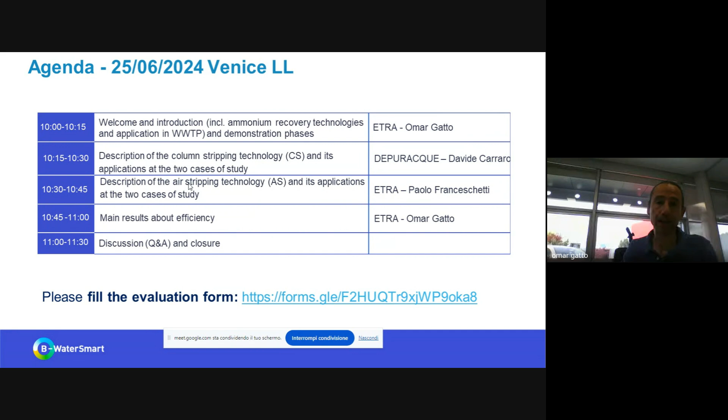The Venice case is a part of the B-WaterSmart project, and there are 6 members: 2 are multi-utility companies, Veritas and ETRA; 2 are private companies in the sector of recovery of water and wastewater treatment plants, that are Hydrotech and Depuracque; then there is Sintef, that is our mentor, and Engineering, that is an IT company.

Our living lab focuses mainly on water recovery, management of sludge, and nitrogen recovery from the streams that are managed inside the wastewater treatment plants, and its recovery as fertilizer.

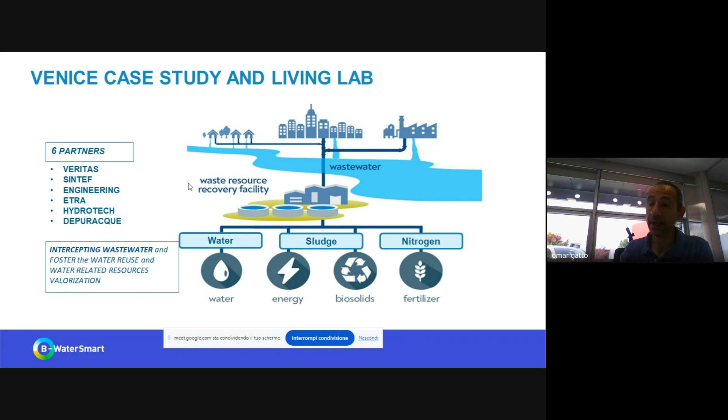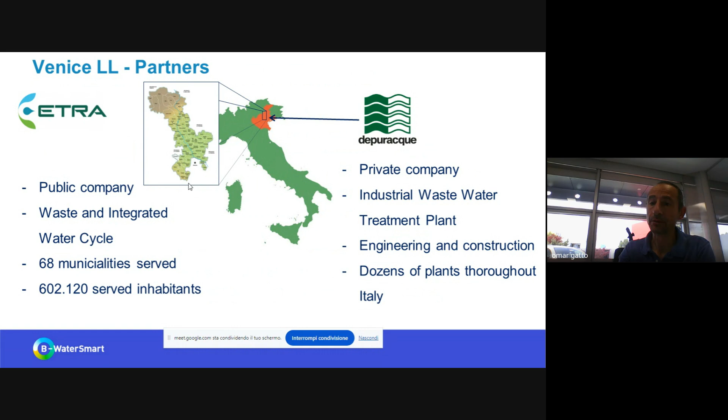The 2 main partners in the pilot tests of the technologies to recover the nitrogen are ETRA and Depuracque. Our focus is on the recovery as fertilizer.

Usually, in ordinary processes in wastewater treatment plants, we manage 3 fertilizing elements: phosphorus, that is segregated inside the biomass of the sludge; carbon, that is decomposed to CO2 and released in the atmosphere, and mainly it is part of the biomass of the sludge, 35% on dry matter, more or less.

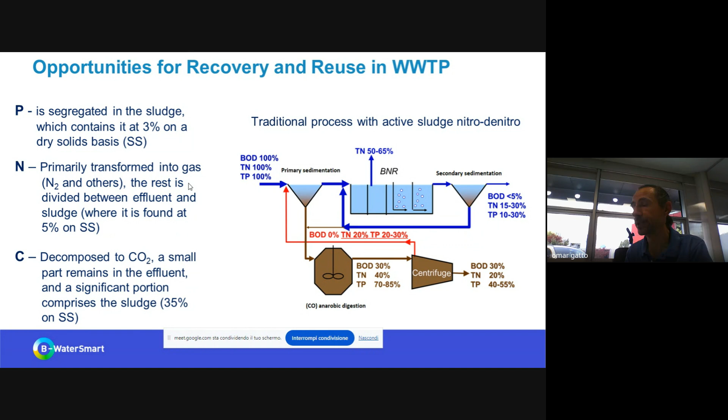And the last one is nitrogen, our element of study, that is mainly transformed into molecular nitrogen, and in this form, passes to the atmosphere, and a little part, some milligrams per liter, exits the plant with the effluent, and more or less 5% of the sludge is composed of nitrogen that forms part of the biomass.

Which are the numbers? What are the numbers we have to deal with talking about nitrogen as recovered fertilizer?

These numbers are an estimation for our entire region, Veneto. As you can see, about 5,000 tons per year of nitrogen remains inside the effluent, and could be recovered with irrigation. Another 2,000 tons per year are inside the sludge that are suitable for agricultural reuse, and they are almost entirely recovered.

And there is another smaller part, 600 tons per year, that could derive from centrates. Centrate is the liquid fraction of the dewatering of the digestate, deriving from the anaerobic digestion of sludge.

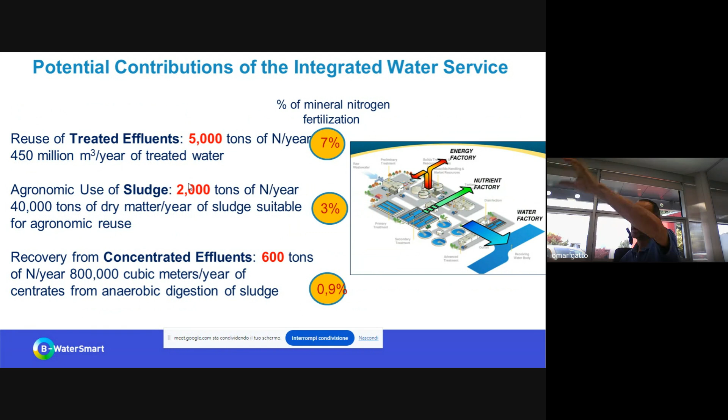On the right side, you can see some percentages. These percentages are the percentage of the total mineral nitrogen fertilization of the region. And as you can see, each fraction of the total nitrogen that can be recovered is small, because nitrogen fertilization in Veneto is very diffused and very used, and approximately 70,000 tons per year of nitrogen is used as mineral fertilizer.

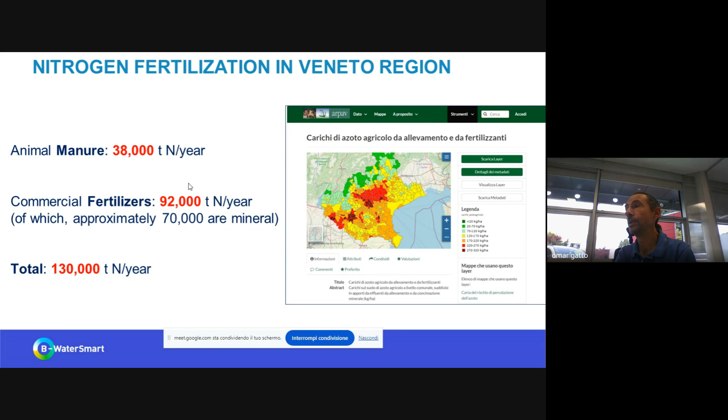But these are small numbers, what we can recover. But we think that it's worth understanding better the issue, because about nitrogen fertilization, we have some problems, because the EU totally depends on non-EU countries to have the fertilizer and the raw materials.

It means that we are hostage of the variation of prices that we saw, particularly during the pandemic and after the war, the Ukrainian war.

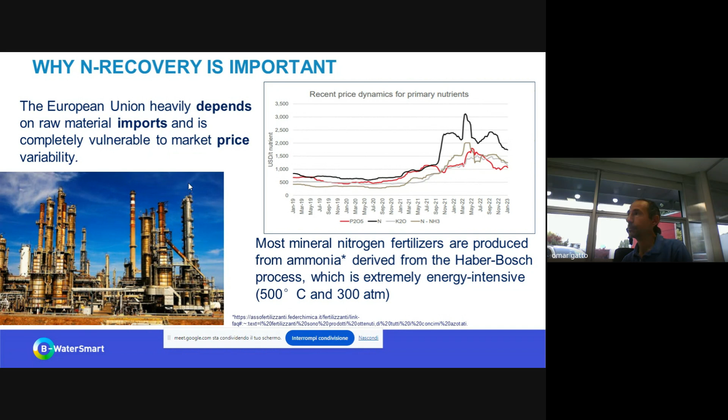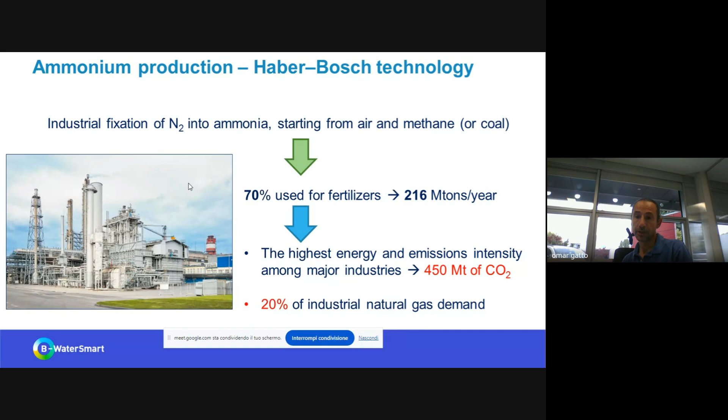And another problem is that mainly nitrogen fertilizer is produced by the Haber-Bosch process, that works at very high temperature and pressures, and it is the highest energy and emission intensity among major industries in the world. So the environmental impact is very high, especially in terms of GHG emissions.

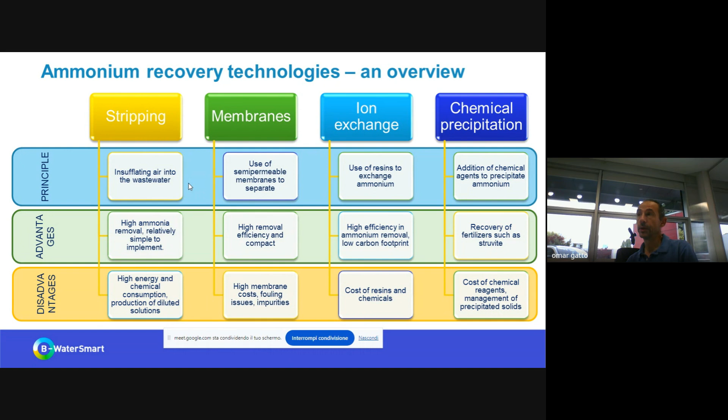Stripping is the last technology, and is the technology we have used in our test. The general principle of stripping is that inside wastewater, ammonia is present in two species: ammonium as salt and ion, and ammonia, a gas dissolved inside the water. If you let an airstream cross the wastewater, the gas ammonia follows the airstream, and this stream enriched in ammonia can be put in contact with an acid, for example sulfuric acid, to produce a solution of a salt, ammonium sulfate in this case.

And in this way, you can recover the ammonia present in the wastewater. The two main parameters that influence the yields of this process are pH and temperature, as you can see in this figure. The higher both pH and temperature are, the higher the yield.

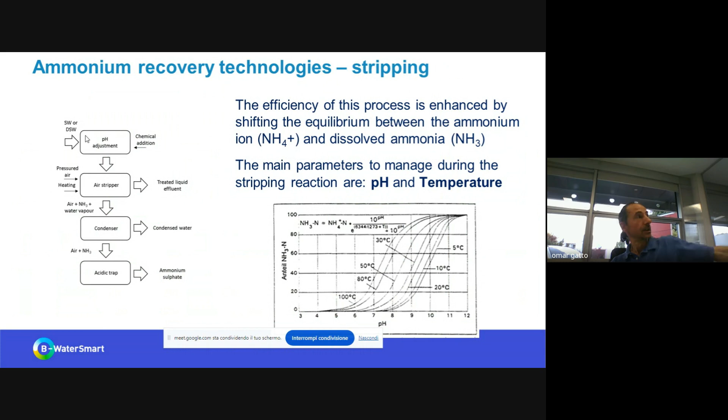Well, after this short introduction, I give the floor to Davide and Paolo, who will talk about the two technologies we used during the pilot test: column stripping and aeration stripping. I leave the chair to Davide, who will talk about column stripping.

Thank you very much, Omar. Hello, everyone. My name is Davide Carraro. I work with Depuracque Servizi, a utility in the Venice area. We engineer wastewater treatment plants, and today I'm going to show you the principle behind the column stripping technology.

Every ammonia-rich wastewater enters inside the first column, and through some nozzles it is sprayed downward, falling by gravity to reach the bottom of the column. Meanwhile, there is a countercurrent air flux in contact with the liquid phase, and by heating the stream to a high temperature and increasing the pH to basic values, we are able to increase the ammonia phase transfer from the liquid phase to the gaseous phase.

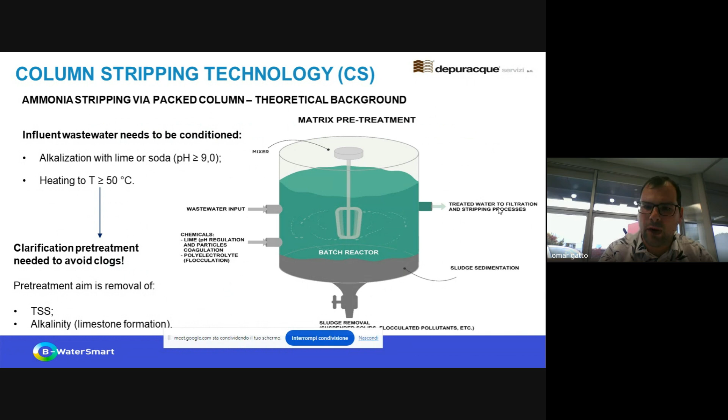Overall, in this slide I show how our stripping plant worked. As you can see from this image, from left to right, we have the wastewater hold-up tank, the flocculation-sedimentation reactor in which the alkalization pretreatment is performed, and then the wastewater reaches the two columns.

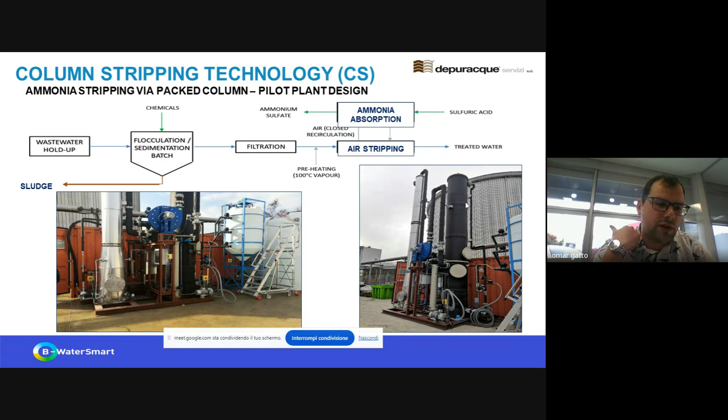Here on the left, you can see the first one, the stripping column, which is made up of stainless steel. And on the right, the absorption column, which is made of a plastic material, since it has to be in contact with the concentrated sulfuric acid.

In conclusion, our plant is able to allow a continuous flow process, and the pretreatment reactor is dimensioned with proper dimensions that guarantee continuous feeding to the column. Our system, compared with other technologies, is more compact and smaller in size, but above all, it can guarantee high quantitative ammonia removal efficiencies.

Since we are able to control either pH or temperature, our working conditions are very flexible, as we can modulate both working pH and temperature, as we'll see later in the results section. As I said before, the fact that we recirculate the gaseous stream allows us to avoid any atmospheric emissions.

However, there are also some disadvantages. I have to mention that our pretreatment generates sludge, which has to be properly disposed of or destroyed. We unfortunately have to precondition the wastewater input in order to remove both suspended solids and alkalinity. And in order for our conditions to be representative, we must run our experiments at a minimum flow rate, which ranges from 250 to 500 liters per hour.

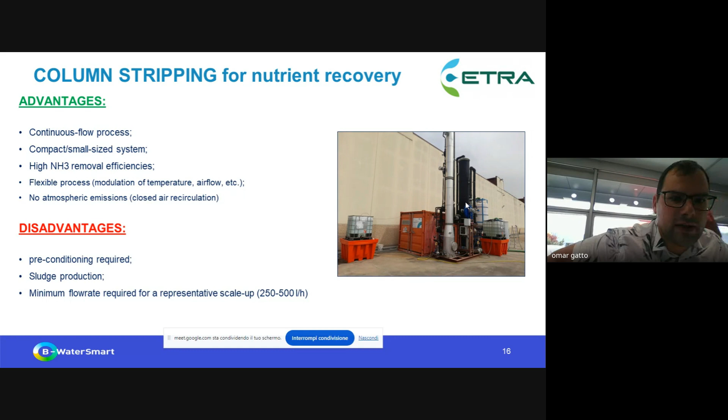ETRA has tested a different kind of technology called air stripping technology, based on the same principle as the technology presented before by my colleague, but there are some differences. First, I want to say that we were the testing partner of this technology, but it was provided by a local private company that built the project's testing pilot.

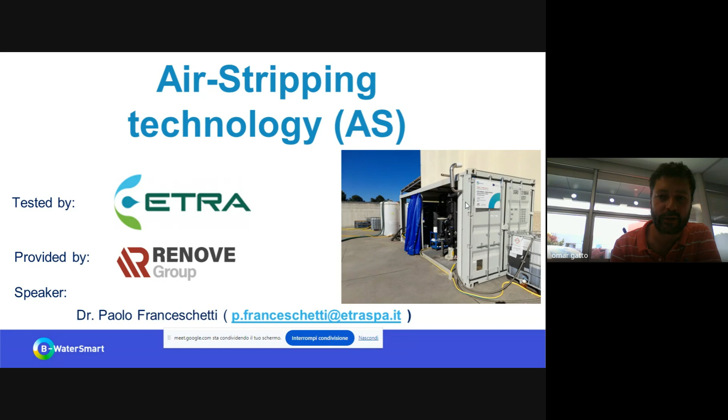The air stripping technology is based, as I said, on the same principle. So we have a stripper and an absorber part. But the main difference is that we feed the stripper directly with the solution that we are going to treat.

So in this case we don't have a pre-treatment, as I said before, but we move inside the stripper, which is a tank, where we are going to heat the solution thanks to waste heat or another source of heat, or in our case electricity, since we use a pilot scale plant. Inside the stripper we have air injection from the bottom with nozzles that create small bubbles.

These bubbles pass through the concentrate, or through the wastewater that we are going to treat. And thanks to the heat, we create ammonia that we take out and move to the absorber.

Here, like before, there are some columns, as explained before by my colleague, where we have air entering from the bottom and going counterflow with sulfuric acid, which produces ammonium sulfate that settles at the bottom.

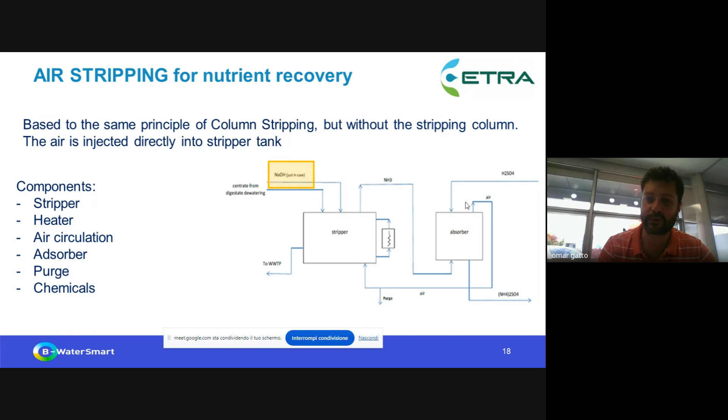We use anti-foam chemicals to avoid the formation of foam inside the empty part of the stripping reactor. We also add a circulation pump that takes the concentrate from the bottom and moves it to the top part, to physically destroy, as much as possible, the formation of foam.

The second problem we solve inside our testing plant is the formation of aerosol. We have a great formation due to the temperature, so evaporation of ammonia and steam, but also the movement caused by the air bubbles inside creates a formation of aerosol.

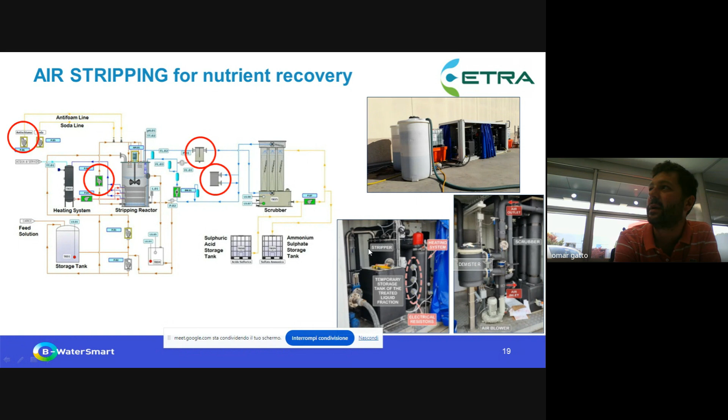Here you can see the demister that we implemented, and this was the stripper with the heating system, which in this case was managed by electric resistance systems.

So, some advantages of these technologies: first, air stripping doesn't need pre-treatment because the solution goes directly into the stripper, so we can treat almost all kinds of wastewater, even with high concentration of solids and hardness, and since the stripper is just a tank, there are no problems of clogging or scaling.

Thanks to this, we don't produce sludge from the treatment, which can be a real advantage from a management point of view, and also in terms of cost for managing the sludge we would otherwise produce.

Potentially, thanks to the degradation of carbonates, the pH moves up on its own inside the reactor. So the use of chemicals to basify the centrate is not strictly necessary. The use of soda in this case was not important, not necessary at all, for any of the tests.

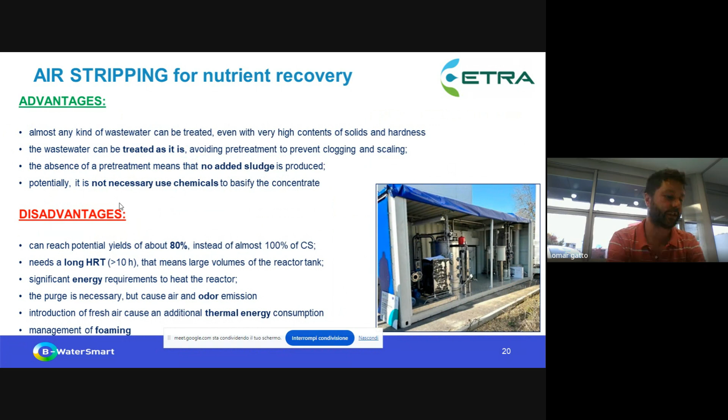And the last one is the formation, as I said, of foaming, which has to be managed maybe with chemicals or a physical system inside the plant.

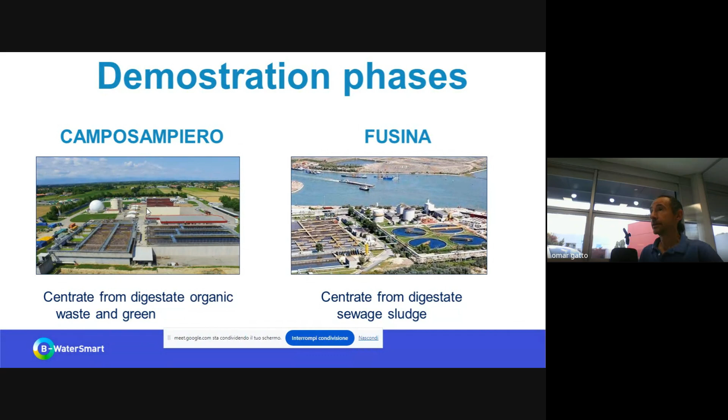In the demonstration phase, we tested the two technologies in different wastewater treatment plants. The first one is Camposampiero, managed by ETRA, and the second one is Fusina, managed by Veritas.

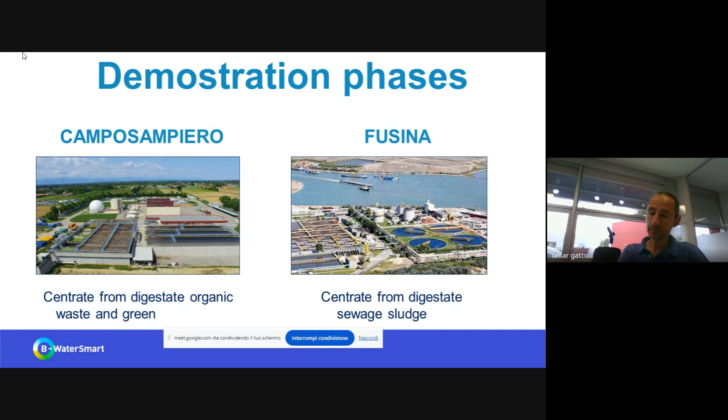We used two different centrates. In Camposampiero, we used a centrate derived from the anaerobic digestion of organic waste and green waste. In Fusina, we used a centrate derived from the anaerobic digestion of sludge. It means we had four demonstration phases.

In this table, you can see the numbers of the main parameters of the centrates we treated in these four cases. Demo 1 and Demo 3 used the same centrate, the one produced in Fusina. Of course it changes over time, but more or less it's the same.

I have to underline that in Demo 2 and Demo 4 we used the same centrate, but in Demo 2, with air stripping, we were able to treat the centrate as is, with a very high load in terms of solids, ammonium, and alkalinity, without any problems. While in Demo 4, with column stripping, which as already said by Davide is more sophisticated and more sensitive to solids and alkalinity, we had to dilute the centrate more than 20 times to be able to treat it.

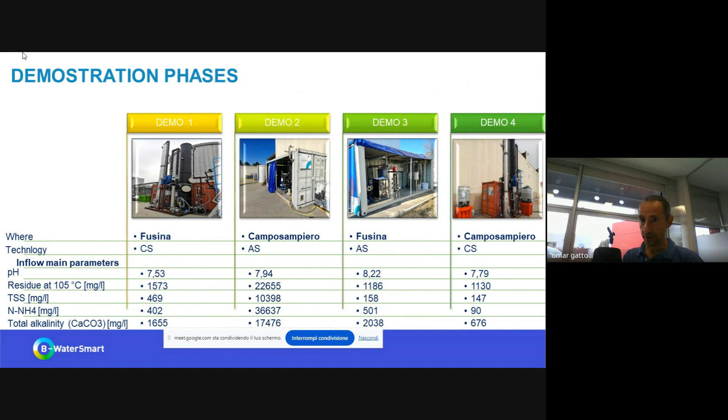In general, I'm talking about the tests of yields versus the most important parameters that govern this process, that are temperature and pH. We had the normal expected trends against these two parameters.

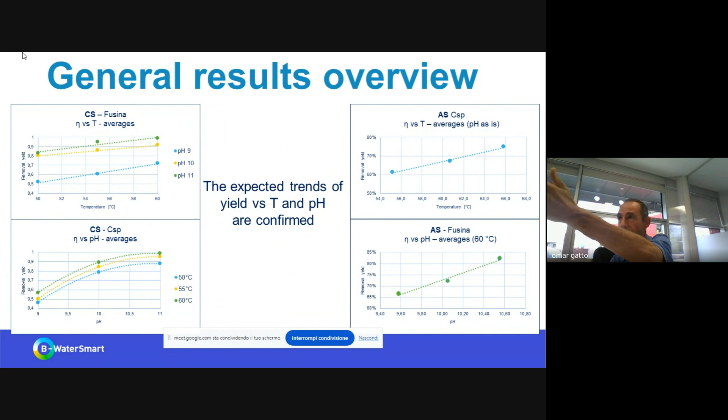These results are as expected, and I think it's more interesting to note that with column stripping we can reach almost 100% removal of ammonia, while with AS we reach more or less 80%. But in normal conditions of using AS, we usually stay around 70%.

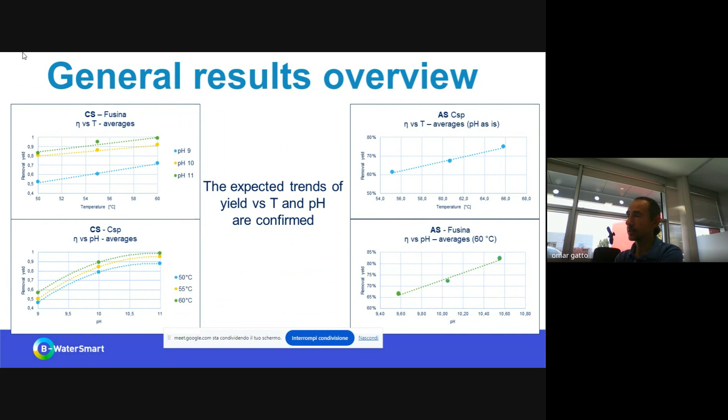Because with aeration stripping, usually we use only the temperature to promote the stripping without using any chemical. So at 60 degrees, we reach more or less 67-70% yield. Some interesting things.

And more, sodium hydroxide adds its own alkalinity, and so the total alkalinity increased.

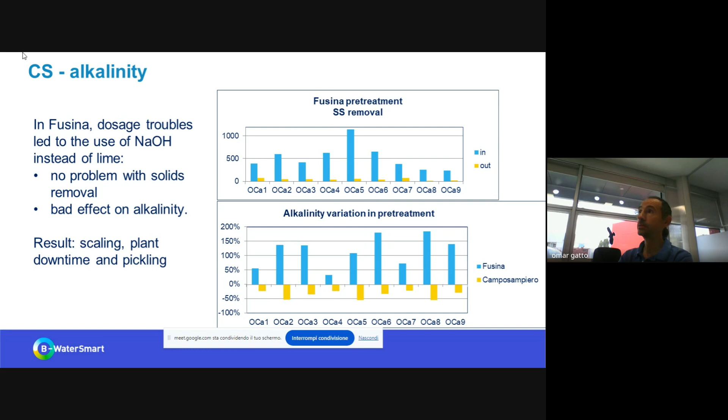In Camposampiero, Puracqua resolved the problem with a substitution of a pump, I think, and there we were able to use much more lime, and lime takes off alkalinity. Another thing you can see - OCA 1, 2, etc.

are the operating conditions of the different tests. OCA 2, 5, and 8 are the conditions at different temperatures, but always at pH 10. You can see that this is the best condition to remove alkalinity.

Probably because at pH 9 the dosage of lime is too low to have a good removal of the carbonates and bicarbonates, and to reach pH 11 from 10, we had to add sodium hydroxide that adds its own alkalinity, and so reduces the yield in terms of removal of alkalinity.

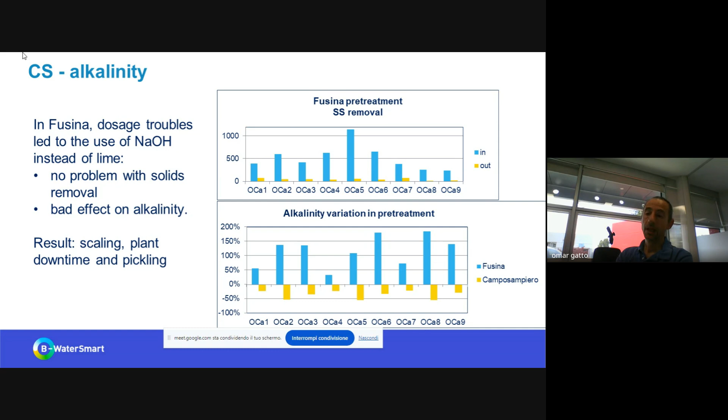About aeration stripping, of particular interest is the relation between yield and air purge, already explained by Paolo. The reason for this purge is, I repeat this idea, this issue.

Inside the wastewater, you have free CO2, a gas that is dragged by the air stream that crosses the wastewater. But you also have, in the centrate we produce, a lot of carbonates and bicarbonates.

These ions are decomposed particularly by the temperature, and the decomposition of these ions produces CO2. You have to take off this CO2.

This is to permit the pH to rise further, because in this way you can release the ammonia that is mainly bound with carbonate and bicarbonate.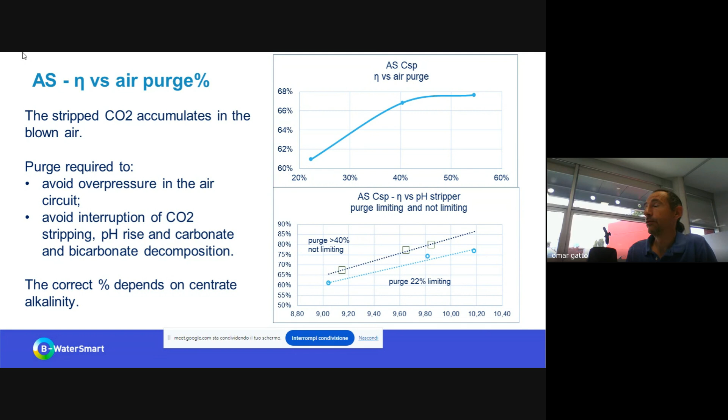The tests we did to see the relation between yield and air purge showed us that you increase the yield until a certain percentage, that in this case is 40%, more or less. But after this percentage, the further purge is useless. It's because at this percentage, the concentration of CO2 inside the airstream is very low, and it's negligible.

And doesn't influence the decomposition of carbonate and bicarbonate. Two notes. The first is that purge is not an absolute number that is valid always, but it depends on the concentration of alkalinity inside the centrate. The higher is this concentration, the higher must be the percentage of purge.

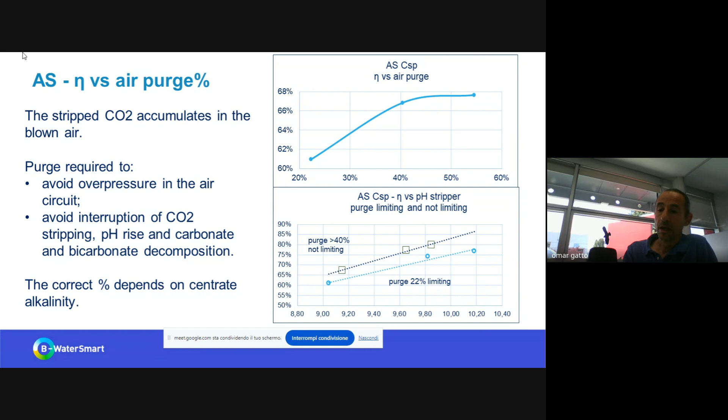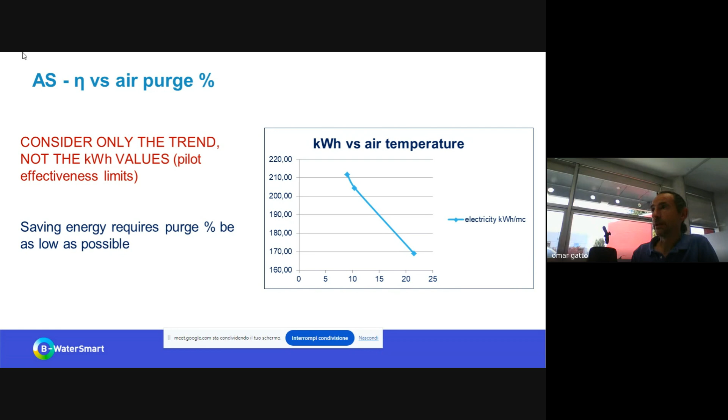Another interesting thing about aeration stripping is that you need very long retention time. It's a problem for the energy consumption. We tested the yield, the trend of yield versus retention times, and we saw that it's asymptotic towards the maximum. So you have to choose the right retention time that can save energy, but make it able to reach the desired yields.

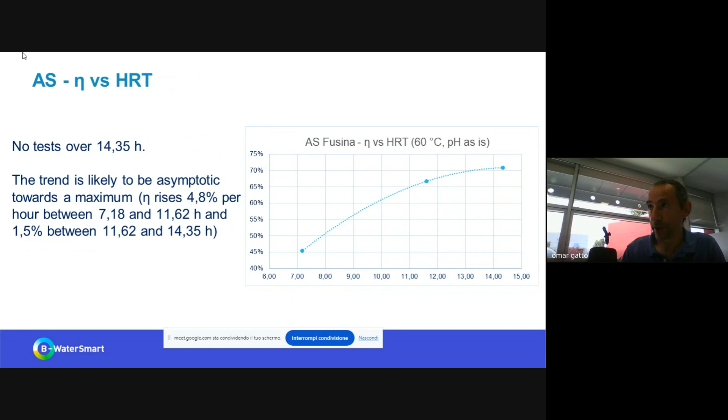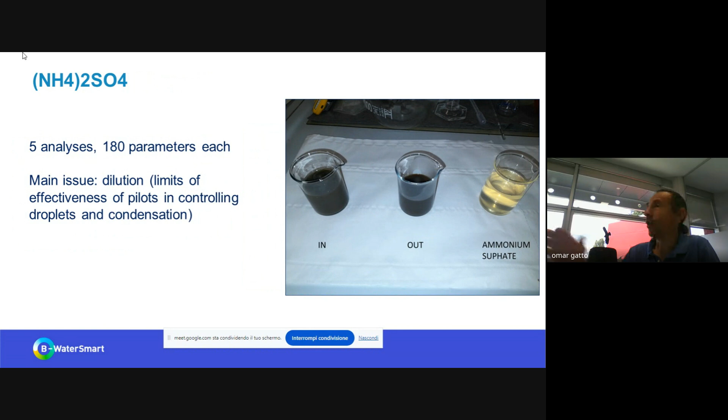About the product, ammonium sulfate we produced, we checked it, we controlled it with 5 analyses and with more than almost 200 parameters. And we saw that the first problem is that it's very dilute.

You have to think that at the maximum we can reach with stripping technologies 30–35% of ammonium sulfate inside the solution, not more. And it means that if you have to transport it toward a user, you have to transport 65–70% of water. It's not very economic, and it's an impact also in terms of environment.

And more, we saw that it's very important to control the production of condensate and droplets that circulate inside the airstream, because it produces further dilution of ammonium sulfate.

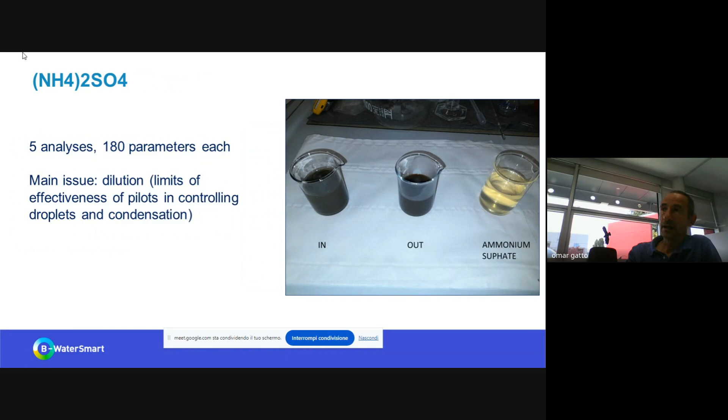Finally, a brief comparison between the two technologies. Aeration stripping is very good technology when you have a centrate very loaded with very high concentrations of solids, of alkalinity, because it's very robust. It's very simple, and it's an advantage both in terms of construction and management, but also very robust and versatile.

Another thing is that it doesn't need a pretreatment, and so you usually don't need to use any chemical, and you don't produce any sludge. Of course, as already said, the problem is that you need long retention times, and so you need much space and more heat than column stripping, and you need purge, so you need more heat too.

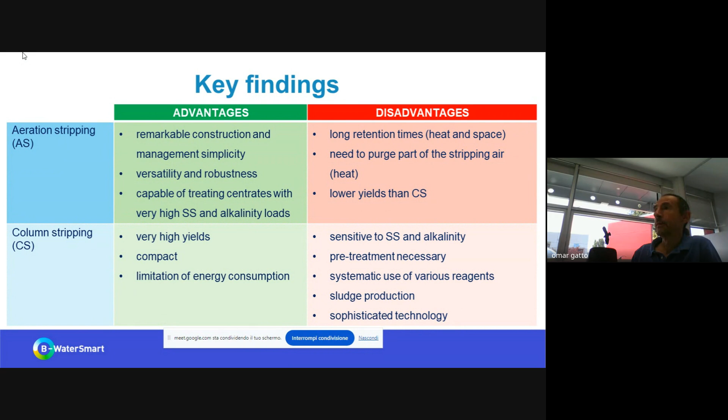What else? This table resumes what I have said.

Yeah. I stop the share of my video.